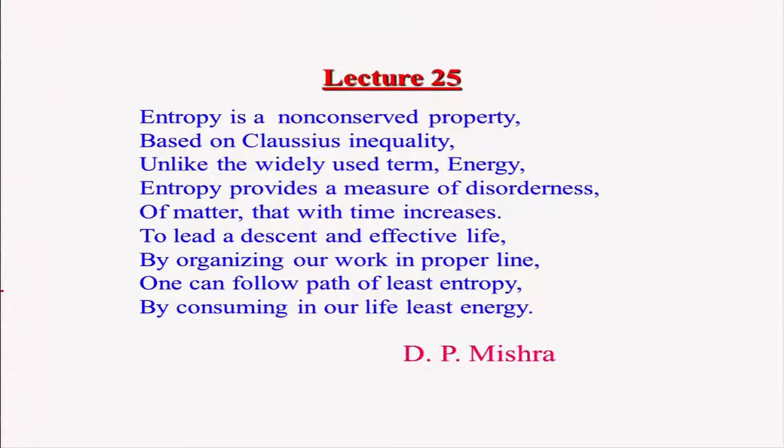So this is what we have learned from the second law of thermodynamics, and what we will do now is just recapitulate certain things we have learned about entropy.

We have seen that a process can take place in a certain direction, satisfying the increase of entropy principle, that is Sg greater than or equal to 0. Of course, for a reversible process it will be equal to 0, and if it violates the principle of entropy increase, then it will not really take place. So a process will take place in a particular direction, not in all directions whatever one can have, and that stipulates the direction of the process, in other words, the feasibility of the process.

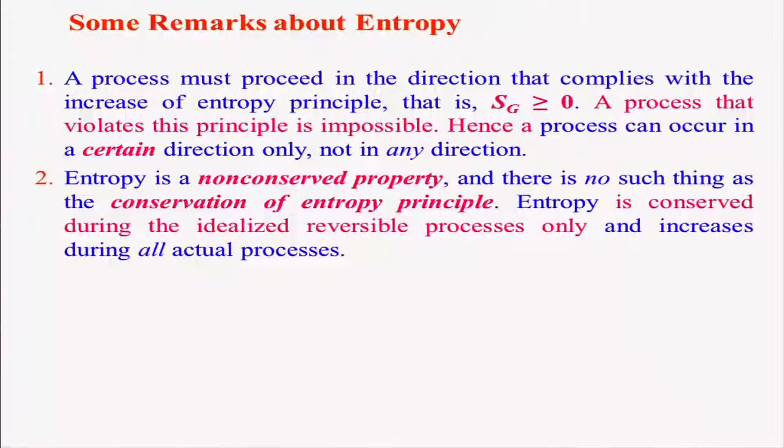As I told earlier, entropy is a non-conserved property, unlike energy. Energy is a conserved property, and according to the increase in entropy principle, entropy goes on increasing. There is no conservation of entropy principle like there is for energy. Of course, whenever the process is reversible, which is the ideal case, entropy can be conserved. Otherwise, it goes on increasing for all real processes.

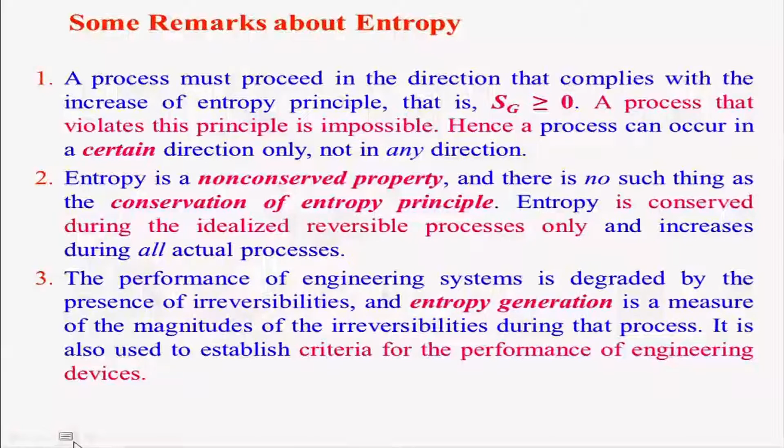We can also judge the performance of an engineering system, how good or how bad it is, and also identify the irreversibility. Once we identify the irreversibility, we try to reduce it such that entropy generation can be minimized. Entropy generation is basically a measure of the magnitude of irreversibility in a process or system, and it establishes the criteria for the performance of engineering devices.

As you go along, we will see various criteria for judging the extent of irreversibility. We will do that, but before that, let us dwell into some applications of entropy, what we have learned in the last lecture.

One way is that we can talk about a process diagram — let's say we are having a PV diagram, we can convert it into a TS diagram and so on. It will be helpful for visualizing the process. So we know that dS is basically dQ by T for a reversible process.

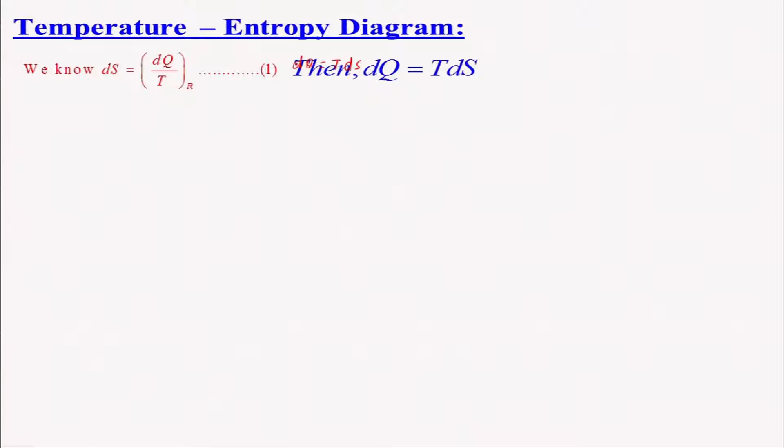From this I can write dQ is equal to T dS — of course this is meant for a reversible process. Then if it is for a cyclic process, we can integrate over it. We can say that it can be integrated from station 1 to station 2, and this strip is nothing but TdS, which is equal to dQ, and this is of course meant for the internally reversible process — that means the system will be reversible, the surroundings may not.

So that area, the total area, can give me how much heat, because this is temperature versus entropy. If I integrate, I will get how much heat interaction is taking place during this process — this area will give me that, and that indicates the integration.

According to the first law of thermodynamics, for a control mass system, considering no kinetic energy change and no potential energy change, we know dU is equal to dQ minus dW. For a reversible process, the work done is PdV and dQ is TdS. If I substitute these values, dW as PdV and dQ as TdS, what do we get? We get the expression dU is equal to TdS minus PdV.

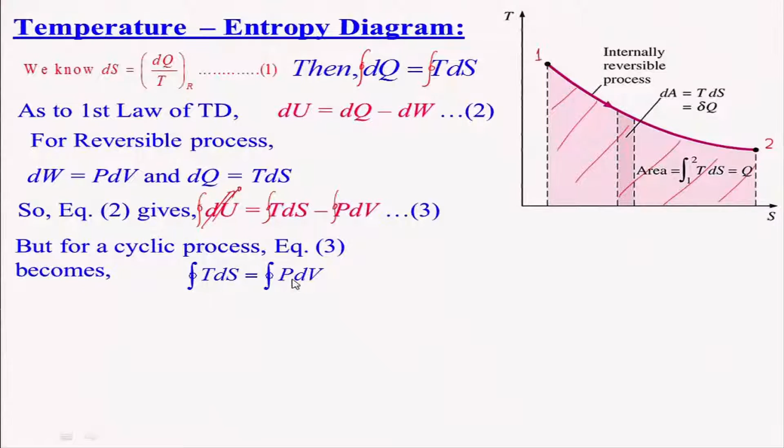If that is the case, then the integral of TdS is equal to the integral of PdV. We know that PdV is work done, so this process TdS, in a cycle, gives the work done. The work done is basically this portion, the hatched portion, which is nothing but the integral of TdS.

For an isentropic process, we know that dq equals Tds. Isentropic process means adiabatic and reversible, so dq is 0. That means ds will be equal to 0, because temperature cannot be 0.

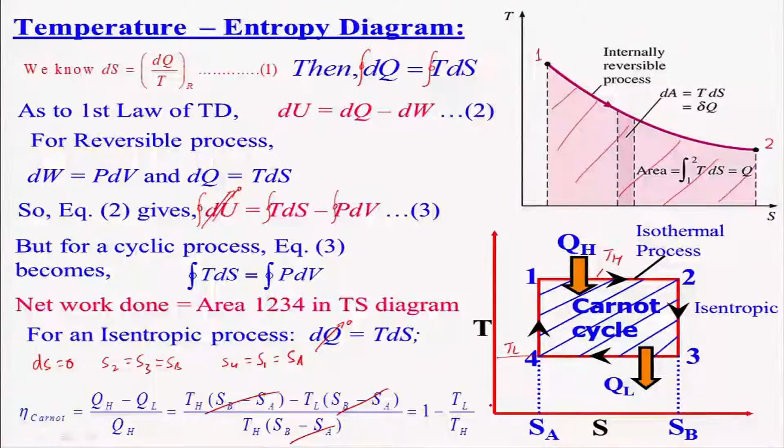So this will cancel out, and you will get the Carnot efficiency equal to 1 minus TL by TH. We have already done that, it is just to relook at it in terms of entropy, which is much easier than what we had done for the ideal gas, where we arrived at a similar expression. But this is a simpler way of expressing Carnot efficiency in terms of the sink temperature and the source temperature.

So this is one aspect of how you can apply the concept of entropy, not only for constructing the process diagram, but also for understanding the process and deriving the expression for Carnot efficiency and other things as well. So let us look at the TdS diagram relationship.

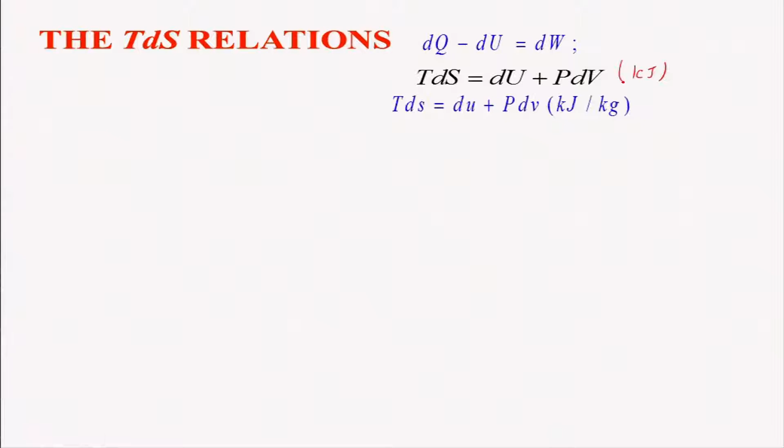We already know that for the control mass, the first law of thermodynamics is basically dq minus du equals dw. And we have also derived the expression TdS equals du plus Pdv, and per unit mass, this is specific entropy equals du plus Pdv, with units in kilojoule per kg.

This expression is known as the first Gibbs equation. We can also derive another Gibbs equation by considering the enthalpy.

Enthalpy is nothing but U plus PV. If you differentiate that, you get dH equals dU plus Pdv plus Vdp. Now what is this dU plus Pdv portion? According to the first Gibbs equation, this is nothing but TdS. So therefore I can express this equation as TdS equals dH minus Vdp. This is known as the second Gibbs equation, which will be very useful for finding out entropy change.

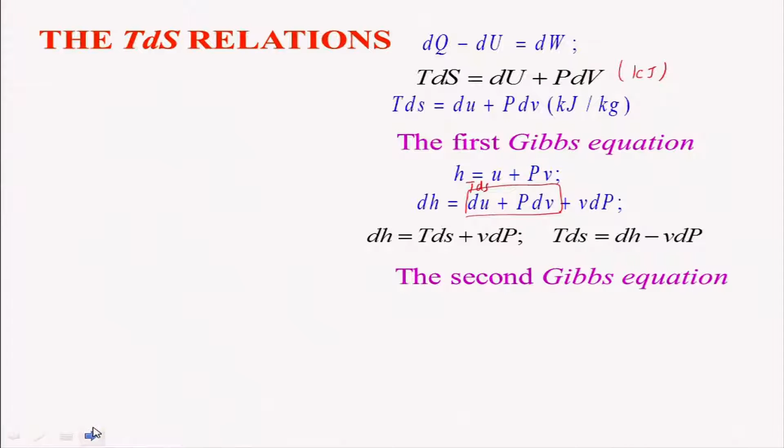Keep in mind that we derived this considering the control mass system. However, it will be valid for both the closed system and an open system. This expression will be valid, and this process will be valid for both reversible and irreversible processes. Although we assumed a reversible process in deriving this, it can still be valid generally.

If I divide this second Gibbs equation by T, I get dS equals dH by T minus Vdp by T. Similarly, if I divide the first Gibbs equation by T, I get dS equals dU by T plus Pdv by T.

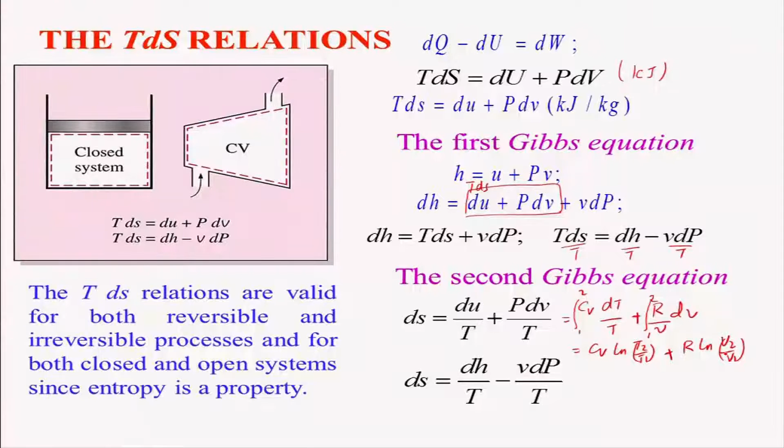For an ideal gas, I can write this as Cv dT by T plus, taking the ideal gas law, R by V into dV. If I integrate it, what do I get? I get dS equals Cv ln(T2/T1) plus R ln(V2/V1). This is valid for an ideal gas, and we have already done this derivation before. Otherwise you can also integrate provided you know Cv as a function of temperature, but here we have assumed Cv is constant, not a function of temperature, so we took it out and integrated.

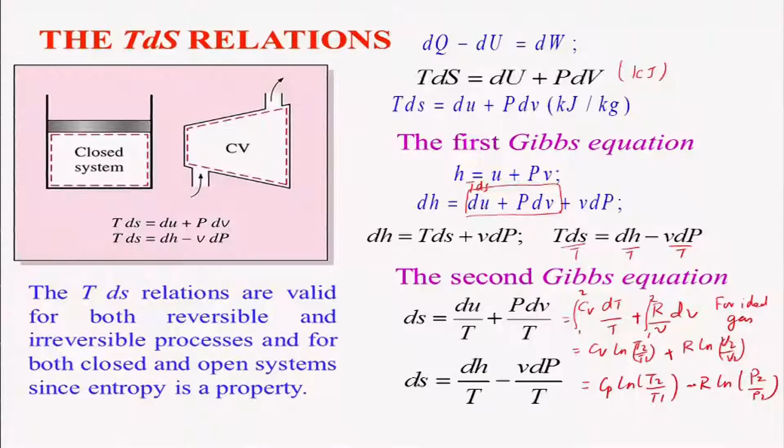Similarly, you can derive another expression: dS equals Cp ln(T2/T1) minus R ln(P2/P1) for an ideal gas. So one can derive that and get an expression, and from this one can easily apply this relationship and find it out.

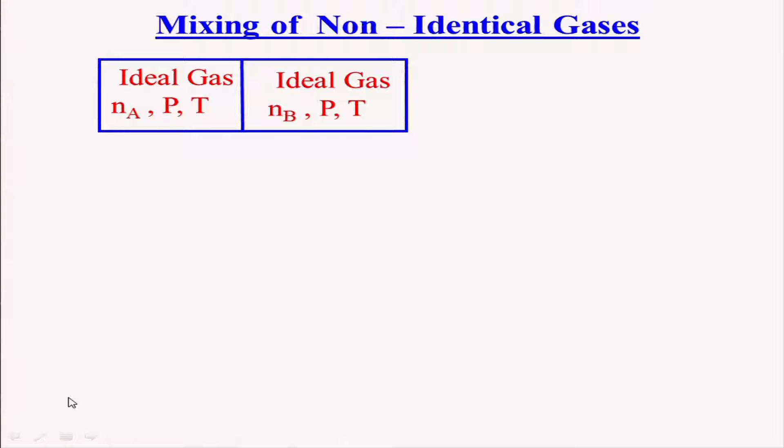Now we will take another example of how to calculate the mixing of non-identical gases. We take an ideal gas of n_A moles at pressure P and T kept in one chamber, and another chamber containing n_B moles of gas at the same pressure, then we remove this partition. If you remove the partition, the gas will mix, and when it mixes there will be a change in entropy, and that is an irreversible process.

Now how do we calculate that? Entropy change for an irreversible process, because mixing is an irreversible process -- you cannot really reverse it back. So one can substitute this process in terms of an equivalent reversible process.

One can think of gas A undergoing a reversible isothermal expansion process, and after that it comes to pressure P_A, its partial pressure, and then passes through a semi-permeable membrane, which is also reversible, forcing the gas through. Similarly, gas B undergoes a reversible isothermal expansion, and then is forced through a semi-permeable membrane as well. So both gases mix within this chamber at partial pressures A and B, with the total pressure being P.

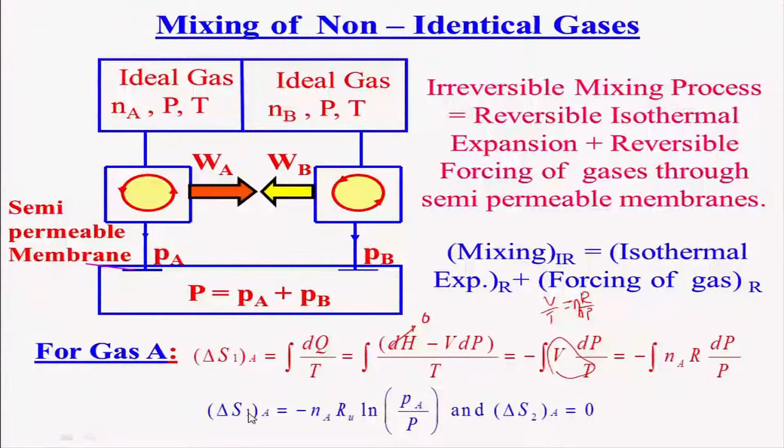So the change in entropy is equal to minus Na Ru ln of P A by P, since it is going to the partial pressure of A from the pressure P. And for the forcing of gas through the semi-permeable membrane, the change in entropy for that second process is equal to 0.

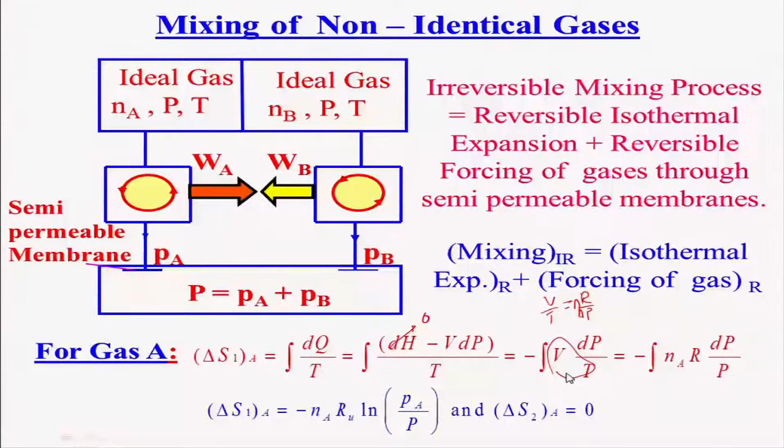A similar expression applies for gas B. We get delta S B equals minus N B R U dP by P. Integrating this gives delta S 1 B equals minus N B R U ln of P B by P, and delta S 2 for gas B will also be equal to 0.

We know that partial pressure is basically equal to the mole fraction. This is mole fraction, which is Na by N, where N is the total mixture, N equals Na plus Nb. So we can express P A as X A times P, where X A is the mole fraction, and similarly P B equals mole fraction of B times the pressure.

So if we add the delta S for both gas A and B for path 1, we reach minus N A R U ln X A minus N B R U ln X B.

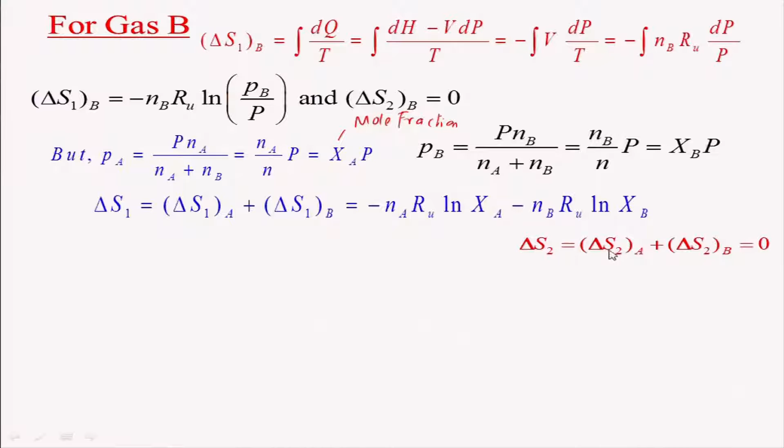We know that delta S 2 for the second process, forcing the gas reversibly through the semi-permeable membrane, is equal to 0. Therefore, the total entropy change during this mixing of the gases will be equal to minus N A R U ln X A minus N B R U ln X B.

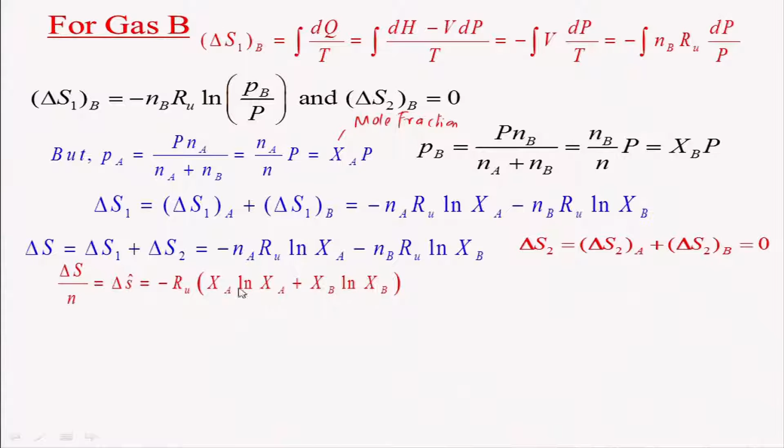And per unit mole you can express this in a similar manner, that is equal to minus R U times X A ln X A plus X B ln X B, in the bracket.

For mixing, we have taken two gases, but it might be nth number of gases one can think of. So the total entropy change, denoted small s, is equal to minus R U times the sum of X I ln X I over the number of gases, whether it be 2, 5, or 10 gases.

So you can find the entropy change for a mixture of gases during mixing, which is an irreversible process. We have found it basically through a reversible pathway.

So if you look at it that way, X I is less than 1. Therefore, the entropy change is always a positive quantity, because X I is less than 1. This also says that it adheres to the principle of entropy increase.

We have discussed a lot about entropy, but a question might be lurking in your mind: what is the physical meaning of entropy? We are talking about it, using it, we know how to calculate it during a process, and it tells us about the quality of energy and the feasibility of a process - lots of applications. But what is the physical meaning of that?

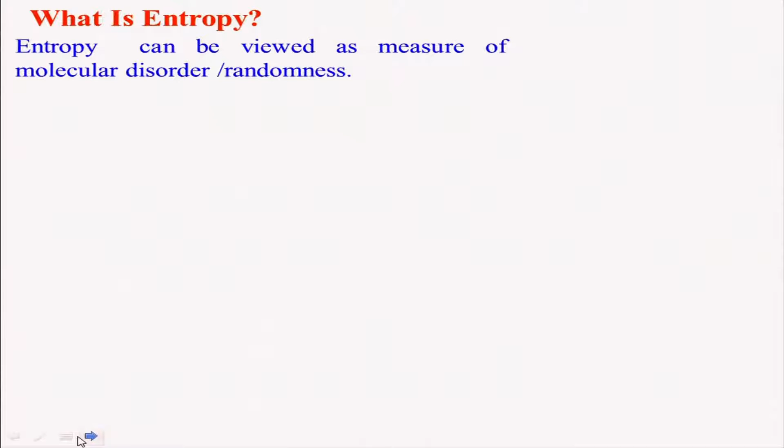Entropy can be viewed as a measure of molecular disorder or randomness, because the molecules will be moving around. If you consider this definition, think about a solid - what will be the entropy? For a gas, what will be the entropy? In which case will the entropy be higher?

The simple definition itself tells you that in the solid case, the molecules are in very close contact and vibrate around their own positions - they do not really change position. Therefore, the entropy will be very, very small. The liquid is a little more movable - it goes together but it moves, so liquid entropy is higher, and gaseous entropy is the highest among all three states of matter.

I had given an example earlier: in earlier days, our bond in the family was very strong, so we had less entropy - stress levels in life were very small because stress was shared by others. Later, the family degenerated in our country and we became like a liquid state, entropy increases, and today we are in a gaseous state. So we face a lot of problems in life because we are moving at a faster rate, and therefore efficiency comes down and entropy increases.

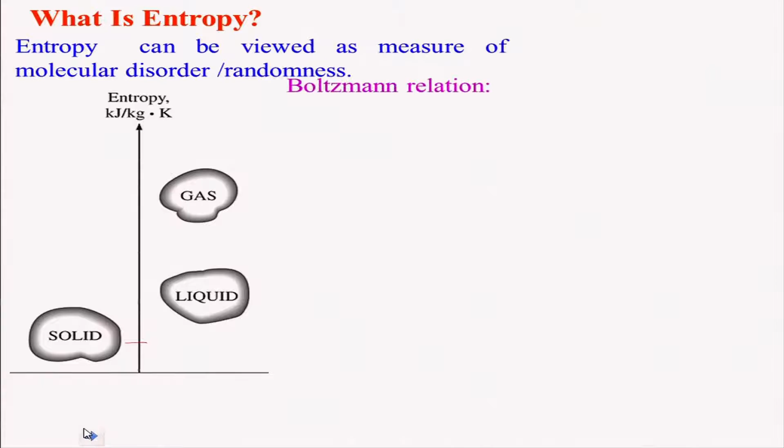From the statistical point of view, we can express entropy using the Boltzmann relationship: S equals K ln W, where K is the Boltzmann constant and W is the thermodynamic probability, representing the extent of randomness available.

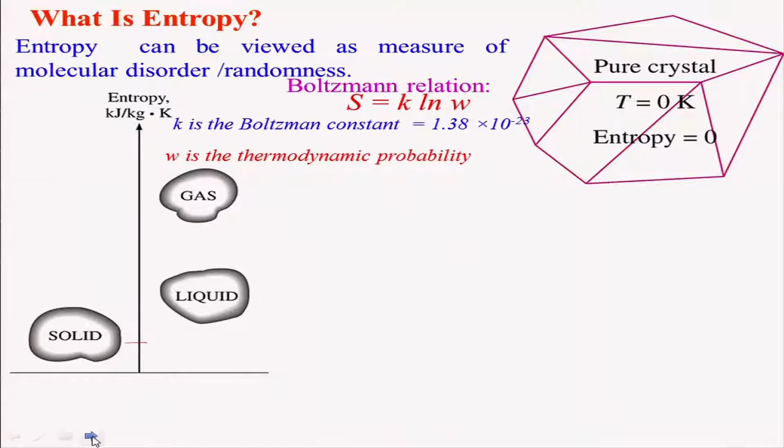This depends on the temperature. If you take a solid at a higher temperature, the entropy will be higher. If you take a pure crystal, you will find the entropy is 0 only when the temperature is 0. If the temperature is different, it cannot be 0 - it will be some finite value. This is basically the third law of thermodynamics: a pure crystalline substance at absolute 0 temperature is in perfect order, and therefore its entropy is 0.

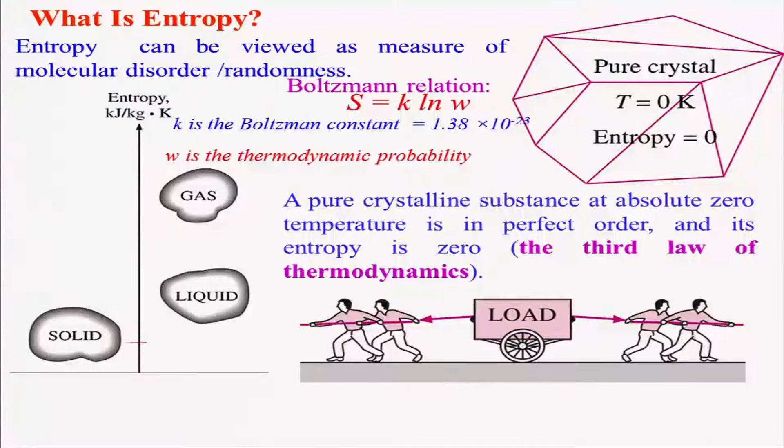Let me illustrate the physical meaning of entropy. Consider a load on a cart being pulled by a few people on the left hand side and also pulled from the right hand side - will it really move, or will it just vibrate, moving here and there randomly? A similar situation happens at a crossing where everybody wants to go, but as a result nobody can manage to go, resulting in a traffic jam. There are several such examples where we encounter entropy.

I'll give another example: suppose before an exam you study a lot, but when you go into the exam hall, it's a blackout - you can't retrieve the information from your memory, because it was not orderly placed.

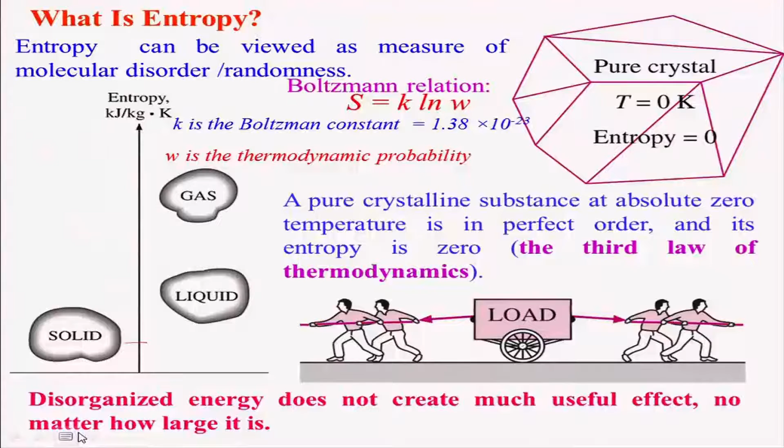Another example: suppose in your room or in a library, the books are kept randomly - it becomes very difficult to locate a book. That means the entropy in that room or library is of a very high order. The higher the order of entropy, the more difficult it is to handle. Disorganized energy does not create much useful effect, although we may be using it. Therefore, one has to take entropy into consideration and minimize it by organizing ourselves.

That is why when I look at you people and compare to when I was in your place, we used to work less. You people are all the time busy, working harder than what I could think, but if you look at the net effect, it is not that effective, and on average, people are not that effective. So to be effective, one has to organize oneself, and that means you will have to minimize the entropy in life.

So till now we have basically looked at how to handle the control mass system or the closed system. But we also need to handle the flow system, where mass will be entering and leaving, with some interaction, and we need to learn how to handle that.

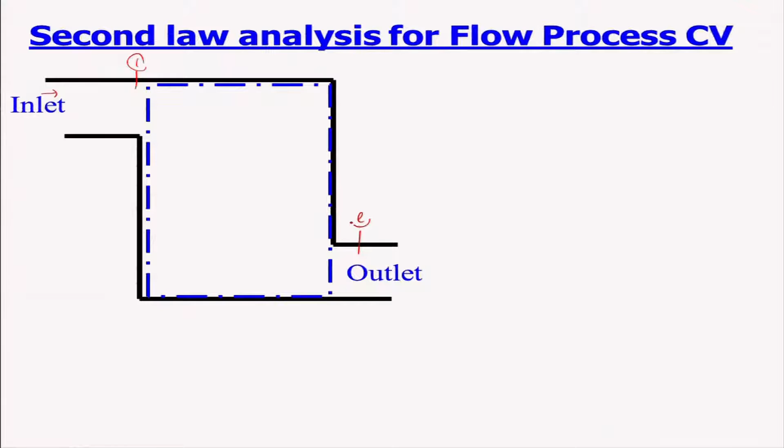We will do it in a similar way. Let us consider a flow system here, where some mass is entering, this is my inlet, and this is my exit. There is some shaft work going on, and there is some heat interaction. Let us say some heat is entering, and as a result there will be some entropy change, entropy generation will be there. I call this dashed line the CV, control volume.

But we have derived the expression for entropy change, which we have seen as delta S equals dq by T plus Sg, entropy generation. That was applied only for the control mass system, but here we have a problem where flow is entering and leaving, mass in and mass out, exit. So how do we handle that?

We will do it in a similar manner to how we handled the first law of thermodynamics. That means this flow process can be converted into a series of non-flow processes, like a video camera converting into various still images. So we can do that.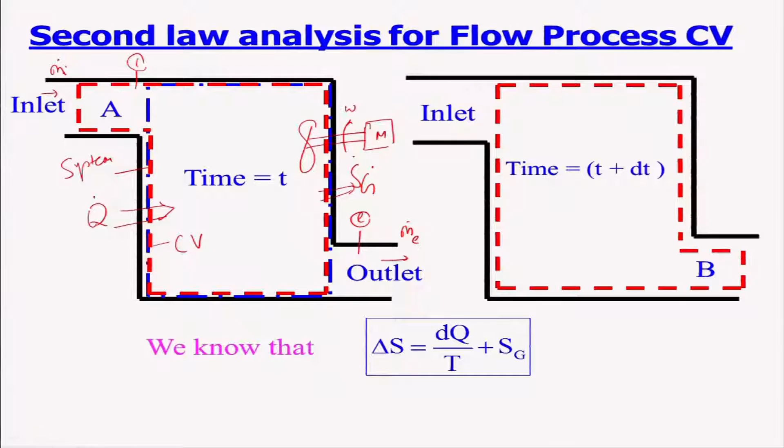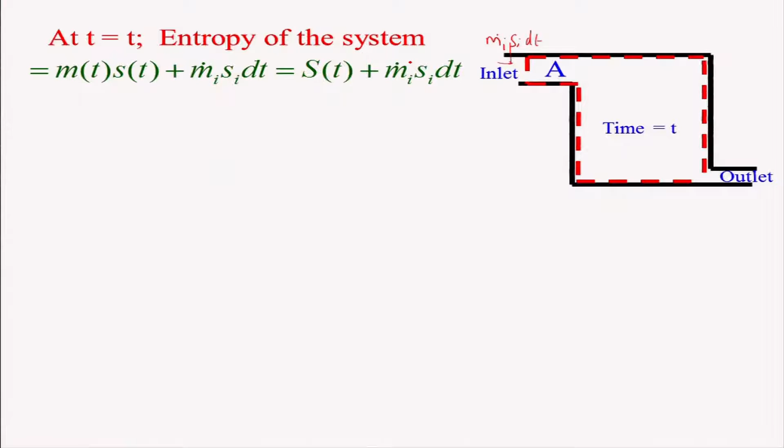At time t, the entropy of the system would be the entropy in this portion, plus the entropy entering, which is m dot i times S i into dt. This is the total entropy at time t plus the amount entering during dt. Similarly, at time t plus dt, the entropy change of the system will be m at t plus dt times entropy at t plus dt, plus the amount of entropy going out, which is m dot e times S e into dt.

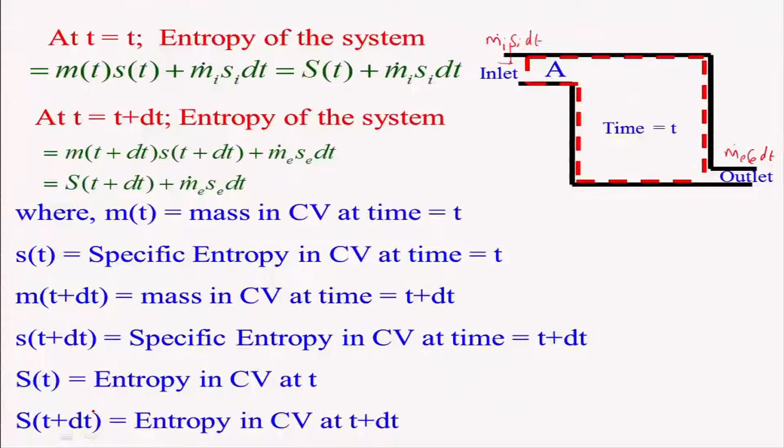So we will do this balance using the entropy change for a control mass system, because we have considered time t as one control mass system and time t plus dt as another control mass system.

We already know this expression, so what we will do is put that in. This is nothing but the change in entropy at the exit minus the entropy at the inlet. This is the entropy at time t plus dt, and this is entropy at time t. The change in entropy equals q dot into dt divided by T, which is the entropy generation rate during time dt, and q dot is the heat transfer rate during time dt.

Therefore, q dot into dt by T becomes dq by T, and this Sg is nothing but the entropy generation during time dt. So you divide through by time dt, this cancels out, and as dt tends towards zero, we get an expression like this: ds by dt plus m dot Se minus m dot Si is equal to q dot divided by T plus Sg. This is the expression for entropy balance in the case of a control volume system or flow system.

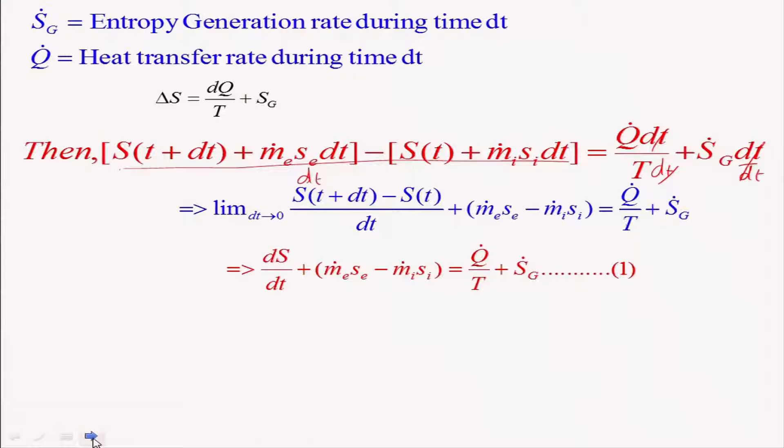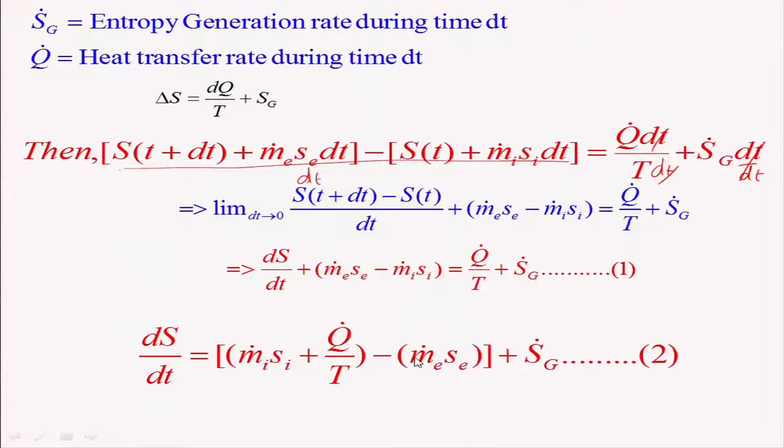So if you look at that, we can rewrite it. I will take this q dot over T as the entropy entering at the inlet, and then I can write down m dot into Se, like here, plus S dot generation.

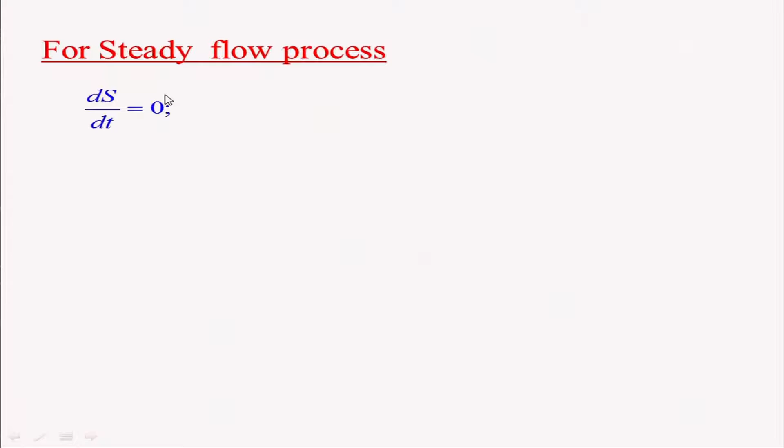For a steady flow process, what will happen is that the entropy change is equal to zero. And of course the mass is conserved, because in a steady state process there is no accumulation of mass. Therefore, m dot inlet is equal to m dot exit is equal to m dot.

So the equation becomes the equation we derived just now: m dot into Se minus Si, that is the change in entropy between exit and inlet, is equal to the heat transfer rate divided by T plus Sg. That means the change in entropy will basically be greater than or equal to q dot over T.

And we have got a similar expression for the control mass system, but the only difference is that here it is the mass flow rate, and this is also the heat transfer rate that is coming in, meaning it is the entropy rate which is considered here.

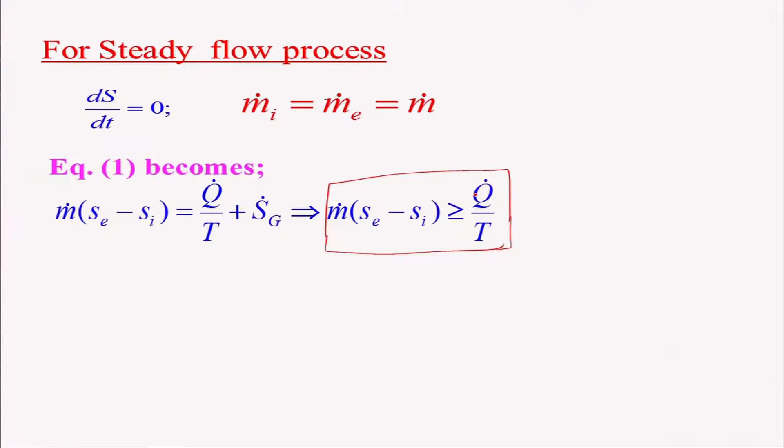And for an adiabatic process, what would it be? Q will be zero. So therefore, the change in entropy will always be greater than or equal to zero for an adiabatic process.

And for an isentropic process, that is equal to zero. Isentropic process means m into Se minus Si equals zero, for a reversible process - reversible and adiabatic - that is nothing but isentropic. So Se is equal to Si, meaning entropy remains the same at the exit and inlet for an isentropic process.

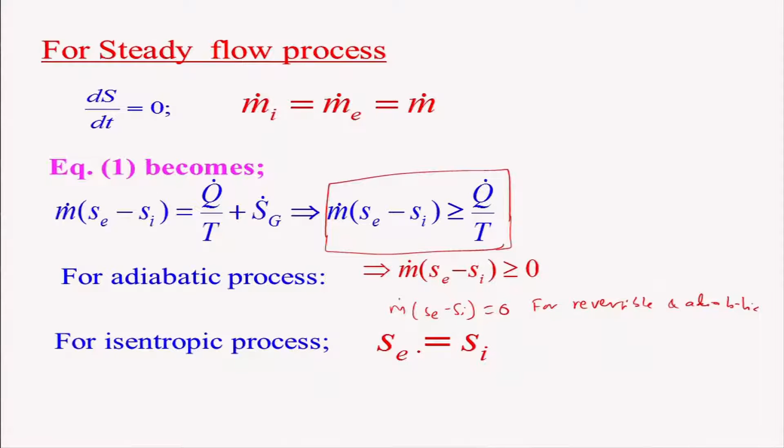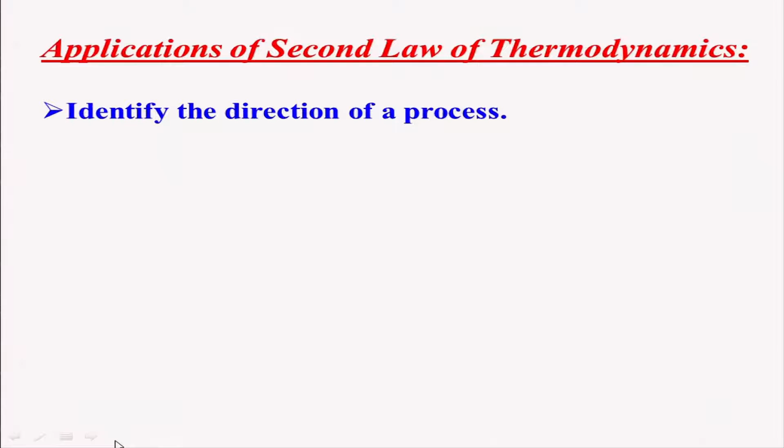Now let's look at the applications of the second law of thermodynamics, which I have already discussed. Let us summarize: to identify the direction of a process, meaning whether the process is feasible or not, and to determine the degradation of energy during the process - that is, the irreversibility, because in irreversibility energy will be degraded. One example is friction, like mixing - another example where energy will be lost and you cannot really retrieve it.

And assessing the quality of energy - for example, suppose I have a large amount of energy, but its quality is low, so I cannot really use it properly. And determining the maximum possible performance of an engineering device, because that gives us a limit which we should strive for.

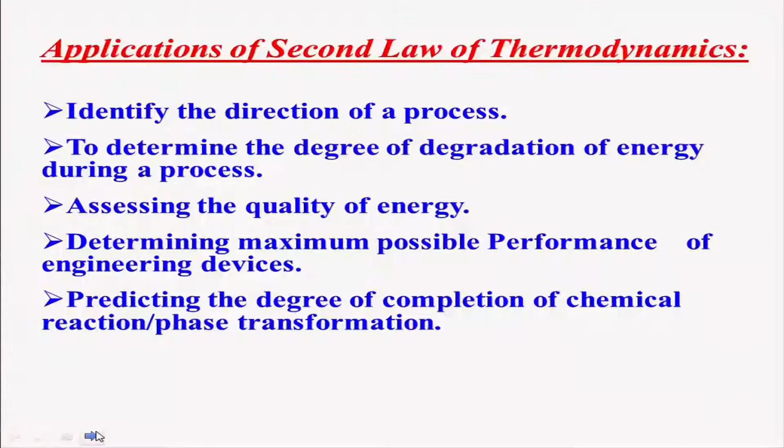Predicting the degree of completion of chemical reaction and phase transformation, we will be using this basically. We will not be discussing it in detail, but we want to calculate the equilibrium product in a chemical reaction, which we can determine by applying the second law of thermodynamics, or entropy.

Let me tell you, we had a discussion about the adiabatic temperature. We have taken a very simple approach by which we felt that okay, we know the product, but actually in the real situation you will not be knowing the product. You will have to calculate the equilibrium products, and by assuming the temperature, you will have to calculate the adiabatic temperature, and it will go on. It is quite a complex process of determining the adiabatic temperature, which we had done in a very simple manner. That is not the actual case one has to do.

So therefore it is very important to look at that. So these are the applications what one can think of.

Let us take an example: an engineer claims to design an air flow device which takes 3 kg of air at 200 kilopascals and 380 Kelvin and delivers 1.2 kg per second of hot air stream at 100 kilopascal and 500 Kelvin, and it also produces 1.8 kg of cold air stream at 100 kilopascal and 300 Kelvin. This device does not require any additional energy as heat for its operation, and there is also no work being produced or given to this kind of device.

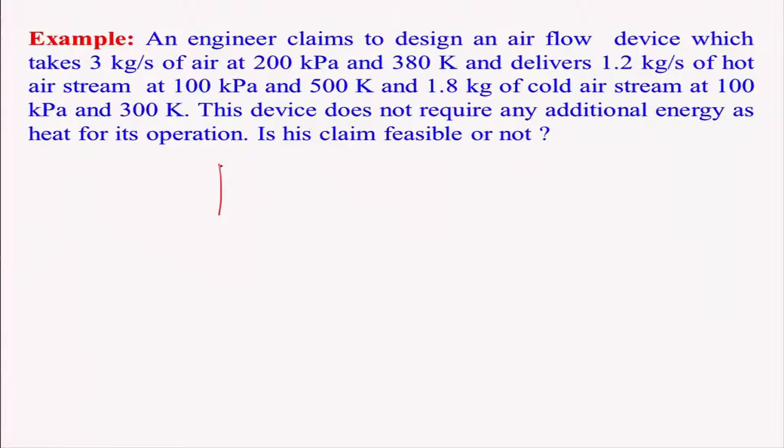But is his claim feasible or not? That is the thing we need to check. So the question arises, how to go about it? It might be coming to your mind, is it really possible to have such a device? If you look at this, this is the one we are having.

If I look at, this is station 1, and 3 kg per second of air is entering. What is the pressure? Pressure is 200 kilopascal and temperature is 380 Kelvin. One stream is coming out with mass 1.2 kg per second, pressure 100 kPa and temperature 500 Kelvin.

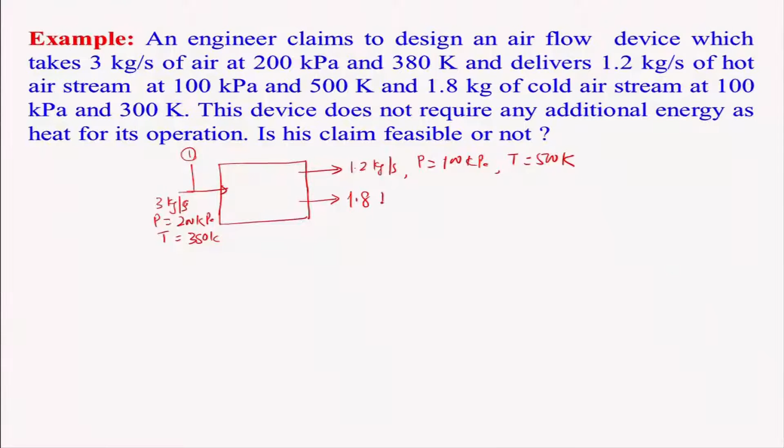And it is also giving another mass of 1.8 kg per second of air. Of course, this is air which is entering, with pressure again 100 kPa and temperature 300 Kelvin. So if you look at this, this is the hot stream and this is your cold stream.

So how to go about it? How will I approach this? Basically it is a simple one. What will you have to approach? You will have to do three things. This is what you call a flow system, so you can consider a control volume as the boundary of this system, that is your control volume, and you will have to do assumptions first.

What are the assumptions? That it is a steady flow process - these are the assumptions. Steady flow, and change in kinetic energy is equal to zero, and change in potential energy is equal to zero.

So for that, if you want to really find out, what will you have to do? You will have to basically look at mass conservation and then energy conservation, then you will have to do an entropy balance - second law of thermodynamics - that you will have to do.

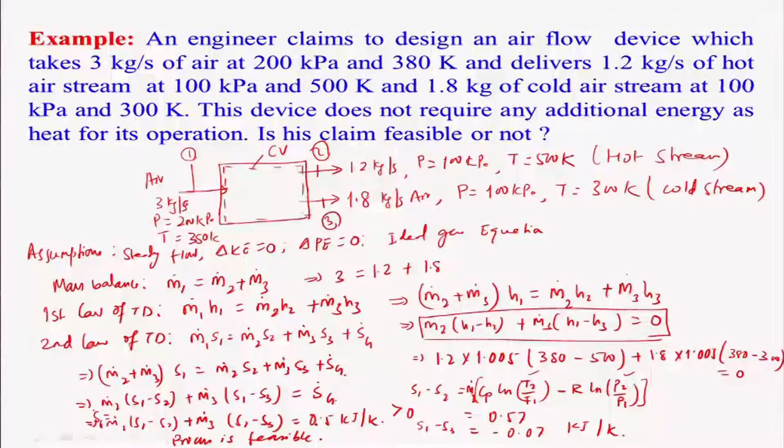So therefore the process is possible, the process is feasible. So by this way you can find out whether the claim is right or wrong. We have seen that if S dot g is greater than 0, then the process is feasible. However, if it is equal to 0, then the process is reversible. But in case S dot g is less than 0, then the process is not possible at all, it is not feasible.

So we have learnt here how to apply basically the second law of thermodynamics for a flow process or a control volume system, you can say.